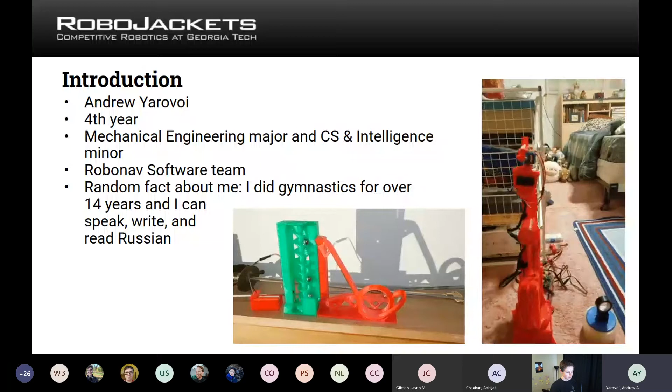Before we start, just a short introduction of myself. My name's Andrew Yarovoi. I'm a fourth year mechanical engineering major and CS intelligence minor. I'm on the RoboNav software team, and just random things about me: I did gymnastics for 14 years, and I can speak, write, and read Russian. These are some projects that I worked on for fun at home. I made a robotic arm and a marble run, I guess that's what we call them. So anyways, getting back into the actual material.

So why do we need to know about sensors? Sensors are the main way our robots perceive and react to the world. Without sensors, the robot can basically only do the same task over and over and would have no idea if it succeeded. It would not be able to adapt to the environment. So basically, all our teams use sensors, and today I'm going to cover the main sensors that all of our teams use.

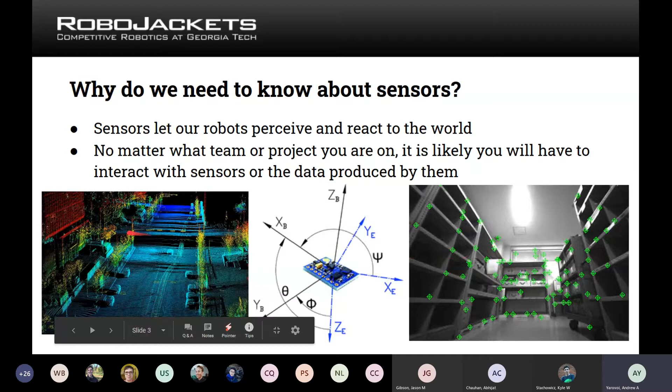Just a few of the pictures here. The right one's the camera image, and you'll see it's actually detecting features, which we'll talk about a little bit later. The left is the Lidar data, and the middle image is the IMU. So we'll start with the IMU. It's probably the most common sensor that our teams use, and most of our robots have at least one, if not two, IMUs. IMU stands for Inertial Measurement Unit. It's actually a combination of multiple sensors that help us measure accelerations and orientation.

They come in a really large range of cost and performance. They all do the same thing, but they can cost anywhere from a couple of dollars to tens of thousands of dollars, depending on how accurately they measure their orientation and how well they can keep trajectory estimates and stuff like that. So this is what the sensor for RoboNav looks like. It's a Yost Labs sensor.

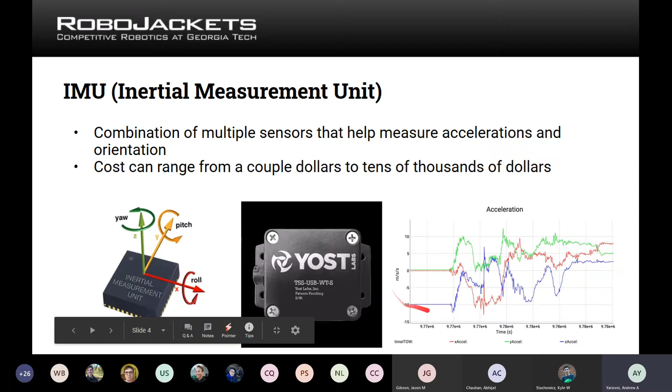IMU, and this is the kind of data you might expect to get from it. So we'll talk about it a little later. So like I said, it's a combination of sensors.

So the first sensor that's included in an IMU is a gyroscope, and usually there's actually 3 of them, one for each axis of rotation. And these help the IMU measure angular velocities. So it's basically how quickly is the sensor rotating. And by integrating angular velocities over time, you can get a relative orientation.

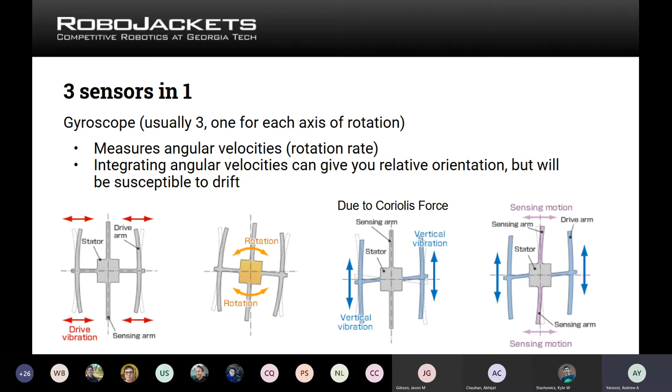So that can tell you like you turned 45 degrees, but it doesn't give you an absolute orientation. So you don't know if you're facing up or down if you don't know where you started. And also over time, this estimate is susceptible to drift, which means that over time the errors build up and your estimate will be pretty bad if you just used a gyroscope.

Then there's the accelerometer, which, as the name implies, measures accelerations. And these are linear accelerations, so just how fast are we accelerating in the x direction or y or z. And again, there's usually 3 of these because there's 3 coordinate directions.

We can integrate it twice to get relative position, but whenever you integrate, noise builds up, and it's not a great way of doing it, but it is one thing you can do, and typically we do this in combination with other sensor data to get position estimates. And also a really important part of accelerometers is that they help you measure the gravity vector, which gives you an absolute orientation in terms of roll and pitch.

And what I mean by roll and pitch is, if you look at this diagram here, our roll axis is rotating along the x-axis, and pitch is along this y-axis here. So it won't give you yaw, but because you can tell the gravity vector, which would be this vector here, you can tell how you're oriented in terms of pitch and roll.

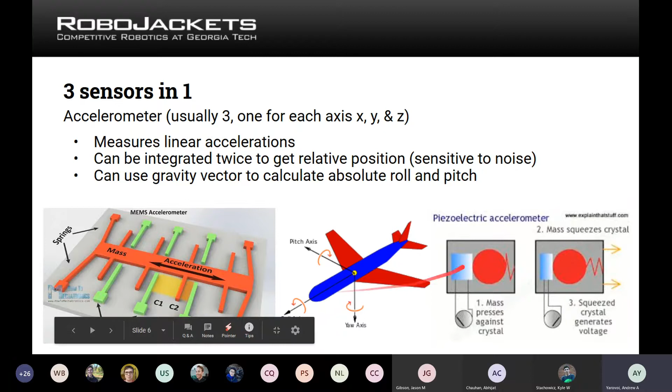Yeah, and these are just some diagrams of how they internally work, but you don't really need to know that, so don't worry too much about that.

And lastly, there's a magnetometer, typically in the IMU. Sometimes there's even 3, but the magnetometer acts just like a compass, and it measures the magnetic fields and can give you an estimate of what is north. It gives you an absolute yaw measurement. So since now we have roll, pitch, and yaw, you can see why an IMU has to use all 3.

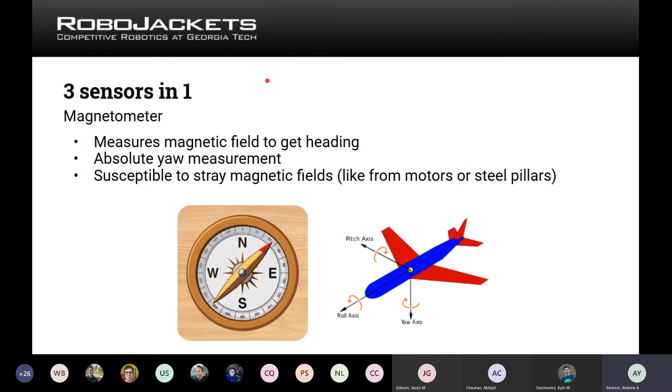And it is a very noisy sensor typically, and it's susceptible to stray magnetic fields. So if you have a motor near your IMU, that's going to completely destroy your magnetometer readings. Also, steel structures around you can skew the magnetometer and make it think that you're facing a different direction. So magnetometers particularly are kind of unreliable. But it's important because it gives you that absolute yaw measurement that we want.

So combining all 3 of those sensors, you get what is called an IMU, and it's basically this tiny board like this, and you'll have an accelerometer, a magnetometer, and a gyro, and it just combines them all. So you can see by turning it can tell its orientation, and here it's just showing a cube of what it thinks the orientation is.

We can also get a short-term trajectory estimate, so where we moved, but this is usually short-term, especially with cheaper sensors, because over time you'll accumulate errors, and really this only gives you maybe a couple seconds of accurate trajectory estimate.

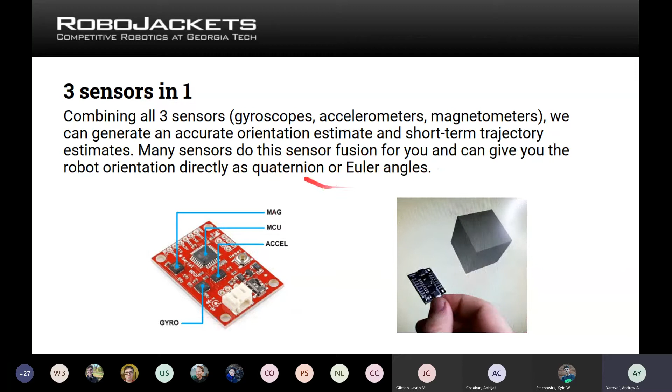A lot of sensors, not all of them, will actually combine these 3 sensor inputs and just give you an orientation directly. But usually these are the higher end sensors. If you get a cheap eBay IMU, you'll have to do this yourself. And you'll get it as a quaternion or Euler angles, and we'll talk about what those are a little later. But yeah, that's basically it for IMUs.

Another sensor that we often use is cameras, and everyone's had experience with cameras. Although they are a great sensor because they give you a lot of information, they can actually be difficult to use for robotics applications because you can't just take the image and immediately...

Yeah, so cheap IMUs will get errors. There's a question in the chat: will cheap IMUs get errors over time? For orientation, they will have more noise, but they won't drift, so the error won't get worse over time. For trajectory, definitely, it'll typically be worse. So back to cameras, I guess. Go ahead, Kyle.

Eventually, IMUs will not give you correct orientation. So for yaw specifically, right? Yeah, for yaw. But you've got a constant: you always know exactly where down is, so you're able to get pitch and roll. But the direction that gravity is pointing doesn't change depending on the heading that you're at, because that's just a top-down rotation, which doesn't change gravity relative to you.

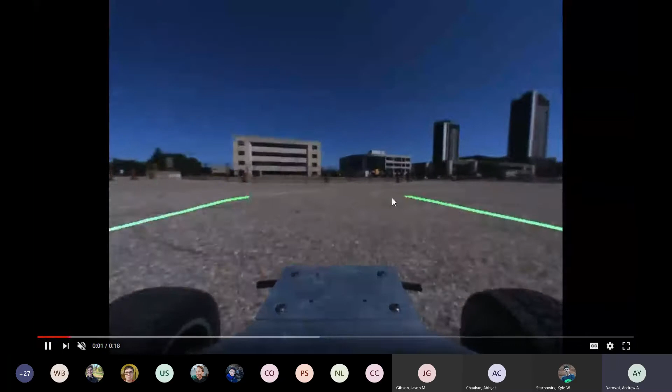This is a quick video from Robo Racing and their robot. You can see them tracking the lines, and I believe they're using OpenCV, so they're not using a neural network. They're just tracking the lines and using that to stay within the track.

I don't think any of our robots are currently doing this, but this is a thing that's quite common to do in a lot of industrial robotics. So, GPS.

Yeah, iPhones, they use RGBD for face detection. I do believe they do that. I think they project the image on your face and then they actually read the pattern. So yeah, they are doing RGBD for that.

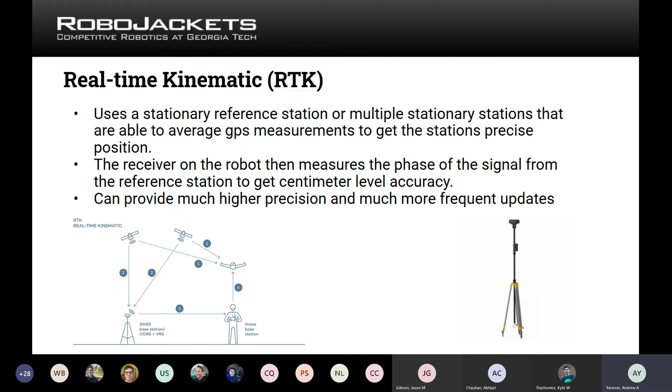So a lot of our teams use GPS especially, and I think Robo Racing is gonna use RTK? I'm not sure. Oh, it's not. Okay. I think for one of their competitions they were considering at least using RTK, but RoboNav and Robo Racing use GPS, I think. I know definitely RoboNav uses GPS.

So another sensor that you'll almost definitely see is encoders. And encoders just measure the position of essentially a shaft or a motor, and they do that by, well, there's a lot of different ways of doing it, but essentially they measure these steps, and by counting the number of steps that have taken place, you can tell the rotation. So like each step might be 1/200th of a rotation, or 1.8 degrees. And if you know that you've moved, say, 10 steps, then you know you've moved 18 degrees.

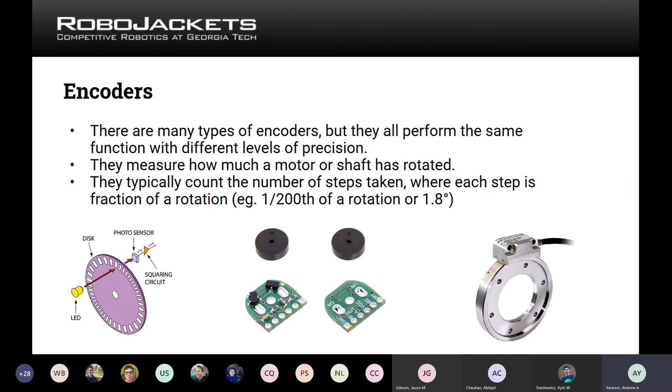And it is kind of a relative measurement, but encoders sometimes have a starting point. So after calibration, you can usually assume that you can tell your exact position. But encoders are often used to measure motor velocities and measure the position of motors. So all our teams use them, and you can use them to get odometry, which is essentially like a rough estimate of how much your wheels moved, and then from that you can calculate what your position change is. Assuming no slip, which is typically a bad assumption.

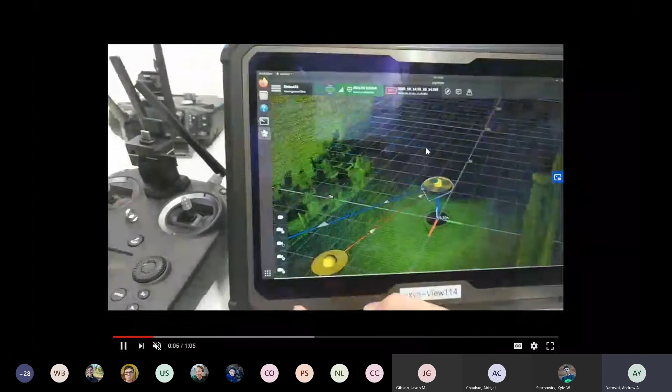So this is a video, actually from my internship this summer, and you can see that even in industry, they use LiDARs a lot, and you can see how it builds a map of the world. Eventually it'll show. But essentially there's a drone flying, and it's tracking its position as well as creating a map of the world using a LiDAR. And this is kind of what the LiDAR view will look like, where you basically have a bunch of points and you can see obstacles along the way. And combining a bunch of sensors, you can tell where you are in the world and navigate.

So yeah. Any questions before I move on? I know I went kind of fast. There's just a lot of material we're going to try to cover today. So if there's no questions, I'll move on to coordinate frames.

So one disclaimer, if you aren't super familiar with matrices, a lot of this is going to be hard to make sense of, especially the math. In that case, just try to get the general concepts. You don't necessarily need to understand all the math. If you're familiar with matrices, I do recommend trying to follow the math, but if you don't, it's fine. If you ever have to do this, first of all, there's oftentimes libraries that will do all the math for you, and second of all, you could always look up resources. This is a pretty common thing that's done in robotics.

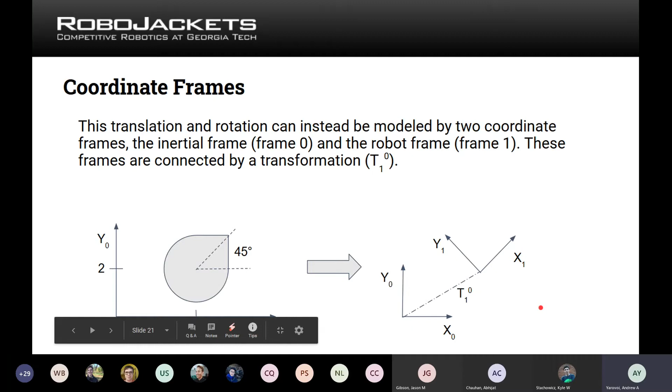With coordinate frames, we can basically describe this image here as just two coordinate frames with a transformation in between. So frame 0 here is the inertial frame, which is your map, and frame 1 is your robot, essentially. This is a very simplified robot, and this is also in 2D, but we'll get into 3D a little bit. It's pretty much the same.

So the first questions that need to be answered are what this transformation looks like mathematically, and why we prefer to use coordinate frames over just keeping track of these translations and rotations. What this transformation looks like is essentially a matrix where you have a rotation matrix, which we'll get to in a second, up top. Then you have a translation vector, which is how much you've moved.

The rotation matrix describes how much you've rotated. And then you have 2 zeros down here, and then a 1. So it's just how you describe it. There are nice mathematical properties that come out of describing it in this form. A translation vector, like I said before, just tells you how much the robot has translated. So for example, if we moved +3 in the x direction and -4 in the y direction, a translation vector would look like this. So it's just 3, -4.

So a rotation matrix, what is it and why do we use it? A rotation matrix is a matrix that expresses a rotation about the origin without scaling. In 2D, it looks like this. So, linear algebra time. You'll have cosine theta, negative sine theta, sine theta, and cosine theta, and this is just a 2 by 2 matrix. And theta describes the angle of the rotation, how much you rotated. So this vector, for example, is rotated by 45 degrees. So you'd plug in 45 degrees for theta, and you'd get a matrix that looks like this.

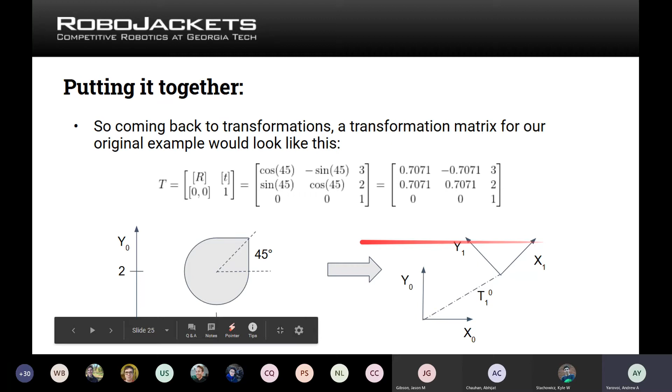Coming back to transformations, the transformation matrix for the original example, where we had the robot move 3 over, 2 up, and then rotate by 45, would look like this. So we have the rotation matrix here in the top left, the translation vector in the top right, and then we have 0, 0, and 1. So this is the transformation that transforms from coordinate frame 0 to 1, I think. I might have got that backwards.

So why do we use transformation matrices and coordinate frames? It's because they allow us to easily figure out where every point on the robot is in every different frame of reference. So say we know that the nose of the robot is 1 unit from the center of the robot. And this coordinate frame is just tracking the center of the robot. This is lined up with the coordinates here.

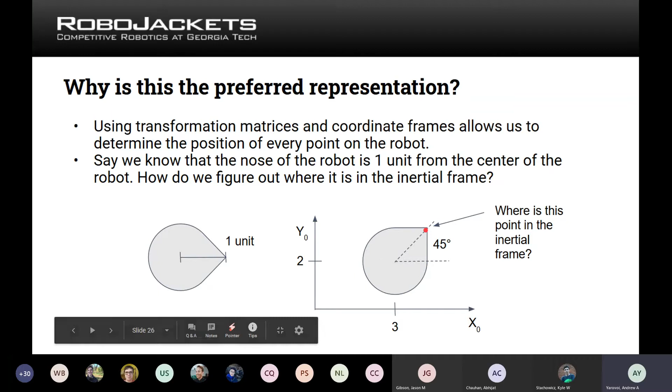So if the nose of the robot is 1 unit from the center, we want to know where is it in the map. So where is it in this inertial frame? We could tell that it's not going to be at 3, 2. It's going to be slightly farther up. But how do we figure out that point mathematically? And it turns out with coordinate frames and transformation matrices, it's very easy.

You essentially just take the point that we know in our robot local frame. So if this is 0, 0 here in the middle, then that point would be at 1, 0 because it's 1x and 0y. And then to convert it into the inertial frame, we convert it into what is called a homogeneous vector, which is literally just adding a 1 at the bottom and making it a 3 by 1 instead of a 2 by 1 vector. And so we add a 1 at the end and then multiply by that transformation matrix that we calculated earlier.

And what we get is the position of that point in the inertial frame. So you can see after multiplying, we get this value, and logically this makes sense. So you'll get a 1 at the bottom here. You basically just ignore that, and the top 2 values are going to be your point.

We can also have a situation that's kind of in reverse. So if we know that we have an obstacle, we will typically know that the obstacle is a certain point in the map. But sometimes we want to know where that robot will see the obstacle. So if this is what the situation looks like, you have a robot and there's a point behind it that it might be sensing somehow. And we want to know in the robot's coordinate frame, where will this point appear? So it's kind of like we're rotating, and this is our new 0, 0, and we want to know where this point is.

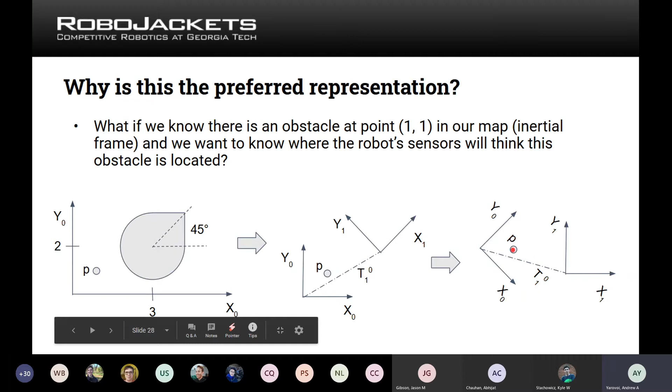Once again, this turns out to be very easy with transformation matrices, because all you have to do is invert the transformation matrix and multiply by the point just like we did before. So that point was at 1, 1 in the inertial frame, or frame 0. And so we just add a 1 at the end. We invert the transformation matrix that we had earlier. And then we multiply it to get the position of that point in the robot's frame. So if a robot had a sensor that's sensing this point, this is where it would sense it, not at 1, 1, because that's where it is in the map.

So this would usually represent your local coordinate frame, and this would be your global coordinate frame, like the inertial frame. And oftentimes you need to be able to transition between the two, so this is why we use transformation matrices.

Okay. So we had a good question. Check the chat or... Yeah.

So is it just the local and global? Both local and global coordinates could be useful for specific tasks. Do you keep track of both? Yes. You do keep track of both coordinate frames, coordinate systems. Oftentimes your sensor inputs will be coming in your local coordinate system, or your robot frame. And then the map that you're trying to build, if you are building a map, will almost always be in a global coordinate frame like this inertial frame.

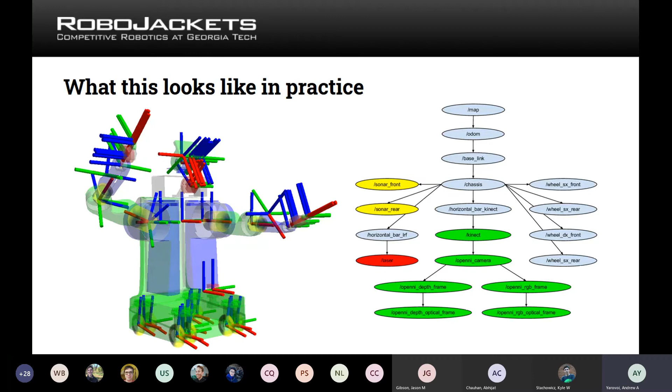Each one of these arrows will represent one of those transformation matrices. If you want to move, say, from map to chassis, you would multiply by them every time you go in the direction of the arrow, and you would multiply by the inverse whenever you go against the arrow. So from any point here, you can go to any other point just by following the arrows. Like I said, a lot of this is handled by packages. TF2 in ROS, you'll get to that later, basically handles all this math for you.

A quick note about rotations. We've talked about rotation matrices, but there are 2 other ways you'll see rotations commonly expressed. They don't work with transformation matrices, so you'll have to convert to a rotation matrix if you get your rotations in any other form, but you should know these other ways of expressing rotations exist. One is Euler angles. This is very common for displaying the information to a human. All of these representations are representing the same rotation, but looking at this matrix, I have no idea what the rotation would be. Looking at Euler angles, you can kind of tell.

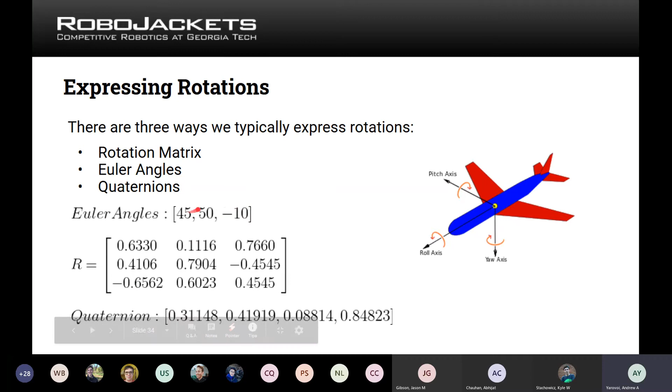There'll be a certain sequence. It depends on your Euler angles, so you'll have to look this up for a particular application, but usually it's roll pitch yaw or yaw pitch roll. That's the order these numbers come in. So if it's roll pitch yaw, this means you roll 45 degrees, then from that starting point you pitch 50 degrees, and then you yaw negative 10 degrees. The advantage is you can actually visualize what this rotation looks like, so oftentimes when it's displayed to a human, this is the way it'll get displayed.

But the issue is doing any sort of math is really bad with Euler angles. There's a lot of problems. The math calculations themselves get kind of messy, and then there's also gimbal lock, which you don't really need to worry about. But basically, you'll get weird things when you try to move continuously through Euler angles. So you don't want to use Euler angles whenever you're doing math. You saw rotation matrices; those were pretty good for doing math.

Another form is quaternions. This is often used if you're only worried about rotations and not translations as well. It's a 4-dimensional coordinate system where you'll have a real part, W, and then X, Y, Z. So complex numbers, the revenge. It can be thought of as a complex number, but instead of having just one imaginary part, it has 3. It sounds very hard, but in reality it's actually really nice mathematically to work with.

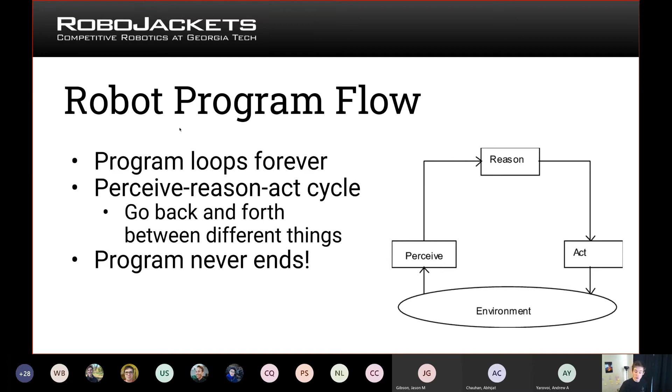And this makes sense with how we intuitively think about what you need to do. You need to see the world, you need to think about it, and you act, and that happens constantly and repeatedly. But it is very different from how we might have written our programs so far. There's a lot more I can say on this, but it's just serving as a motivator here. So state machines are one way you can address this for certain types of things.

So as an example, if you are just writing code in the programming way where you're doing a sequence of function calls, essentially, you might call a function that is move to point goal, right? And then you might raise your arm afterwards. You might say you have an arm on your robot, raise that after move to point. Great, it can do that.

But what if you want to move your arm while you're driving to that point? Do you write a new function that's called like move to point while raising arm? Do you handle all the possible cases there? That's a bit of a pain, right? And there are a lot of ways to address this.

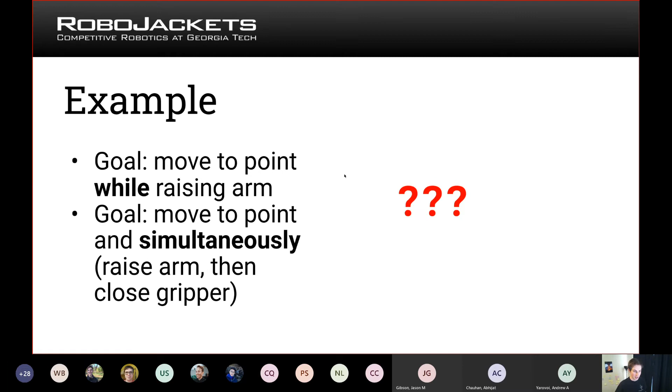Usually what you would do is have your actual subsystems, where you're doing things related to the arm and related to the drivetrain, separately, and have those each have independent cycles. However, for the sake of exposition here, there's another way that you can do that, and that is state machines.

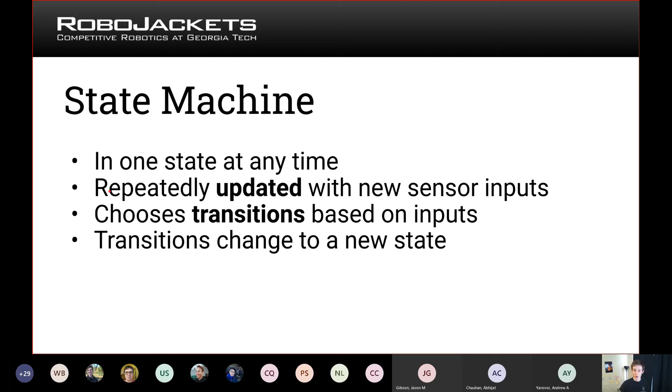Now you want to repeatedly, basically every one of those cycles we were talking about in the reason step, you want to be updating your state based on new sensor inputs, right? And based on decisions that you might make about the environment. Then you want to choose transitions based on those sensor inputs that basically gives you the next state that you'll be in. Now, sometimes that next state is the state that you're already in, and sometimes that will actually represent a change of state.

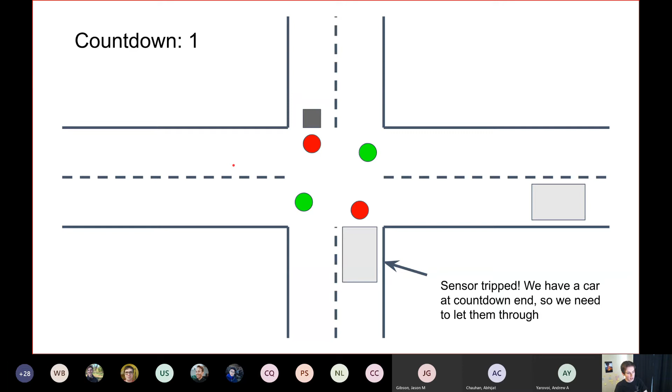Now, there are a couple of very simple rules for this. It operates in cycles, so you might let the road pass in one direction and then let the other road pass, right? And you'd repeat that. You want to be doing yellow lights between green lights, and green lights should be on for 5 seconds. So I'm just going to walk through what this might look like. You might have a countdown, right? And you are waiting for that countdown to end before you exit this green light state for the east-west road. Right? Then at the end of that countdown, you might see that there is a sensor, in fact, tripped on this north-south road. So that means that we want to change the lights, and we change into a temporary everyone red state before changing the lights back to green, at which point we can keep going.

So you'll count down again, right, from that green state. And then here, now we don't have that sensor blocked, so we can actually let that one pass. There's no need to change the lights here, so we can stay green. This is like a very brief explanation. In general, there's a longer write-up that's set up for you guys. But we're going to ask you in the group discussion sections to talk a little bit about this.